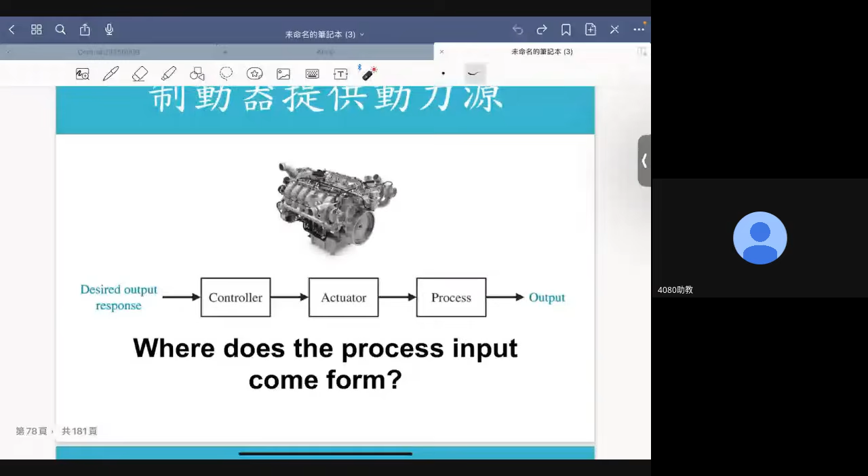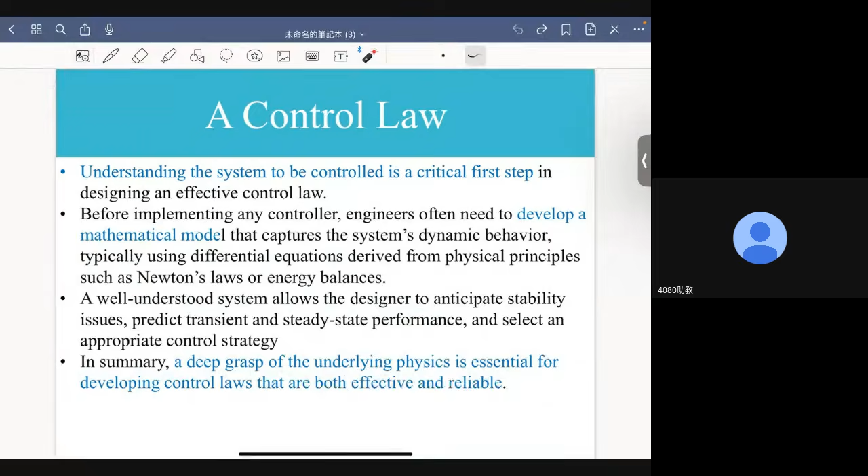To come out with a good control law, understanding the system to be controlled is a crucial first step. A deep grasp of the underlying physics is essential for developing control laws that are both effective and reliable. This is very important for a control engineer. To control a system I want to control, I need to have a very good, deep understanding of the behavior of the system. This is very important, all right?

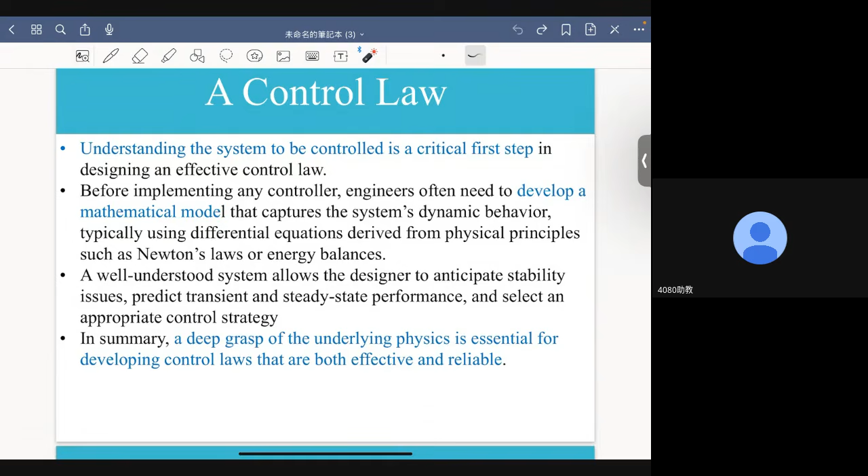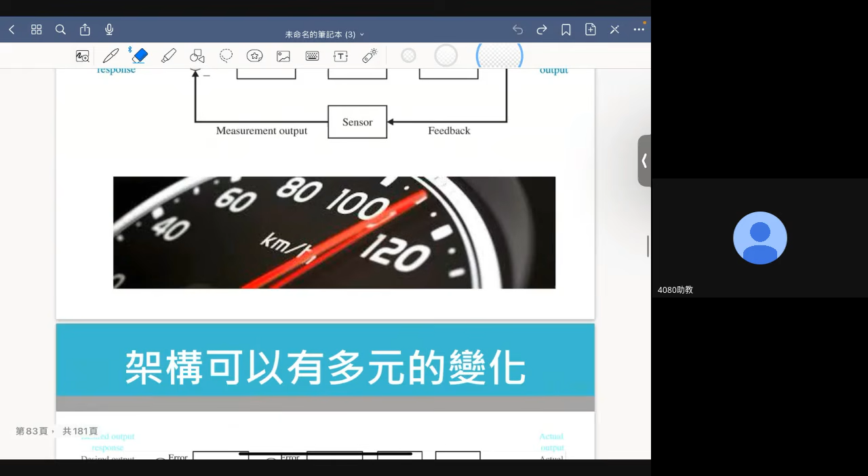Now, in this PowerPoint slide, I want to emphasize that feedback needs a sensor. This is sometimes a disadvantage of feedback control systems. Why? Because you need money to buy sensors. So for this very reason, feedback control is typically much more expensive and also much more complex than open loop control. I will talk about the other limitation later.

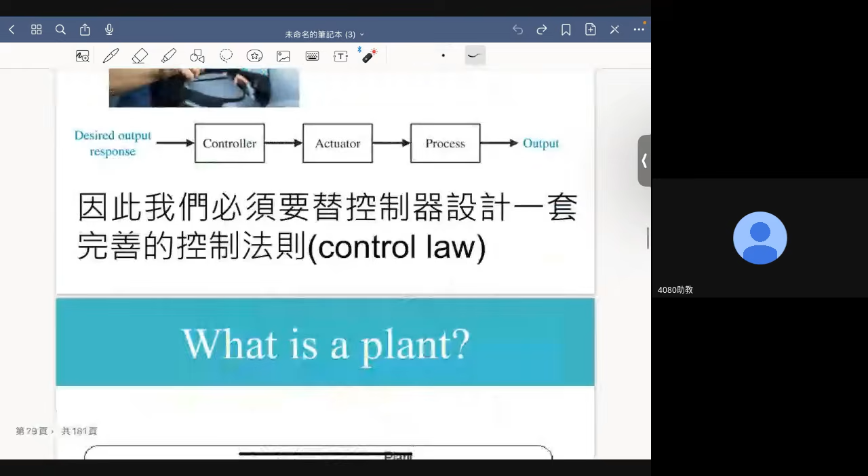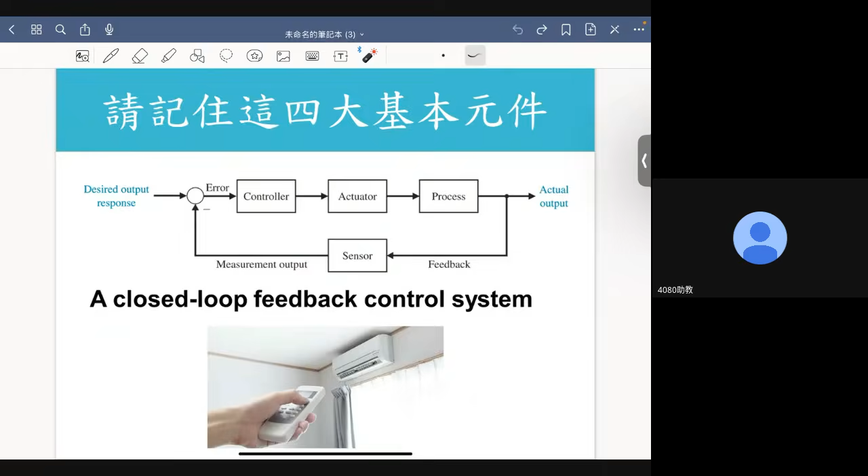Now, in this block diagram, what I want to emphasize is that this diagram illustrates the basic structure of feedback control systems. Based on these basic structures, you can come up with many advanced variations. For example, here is one advanced variation. Here you have two feedback loops.

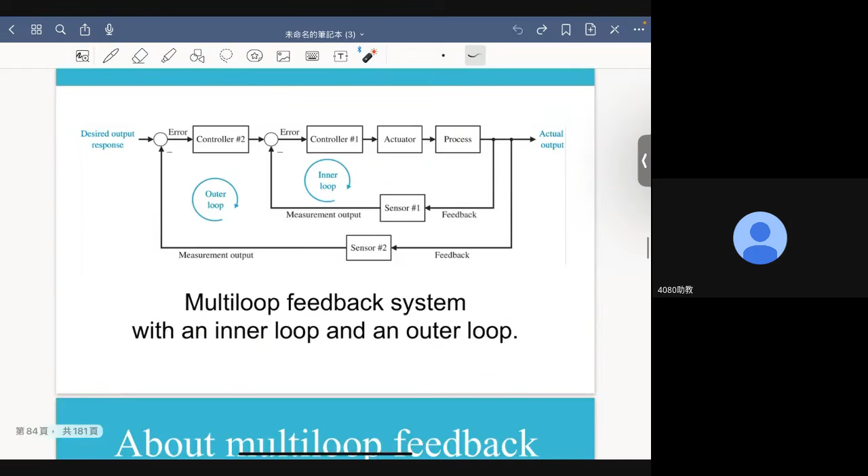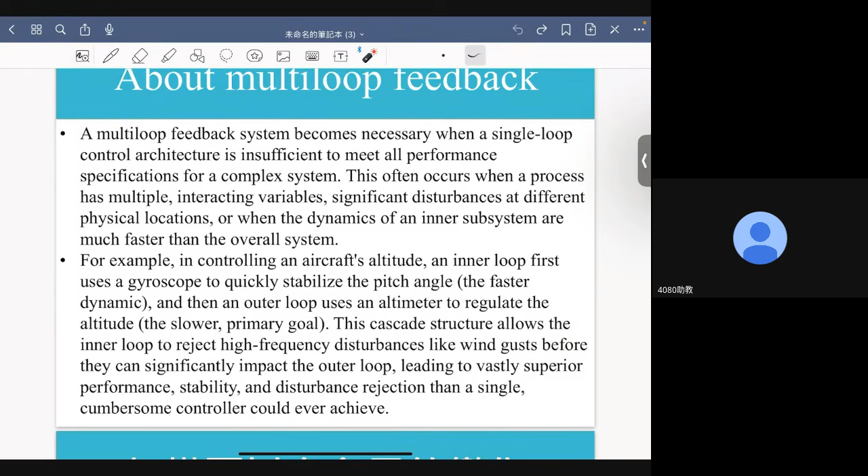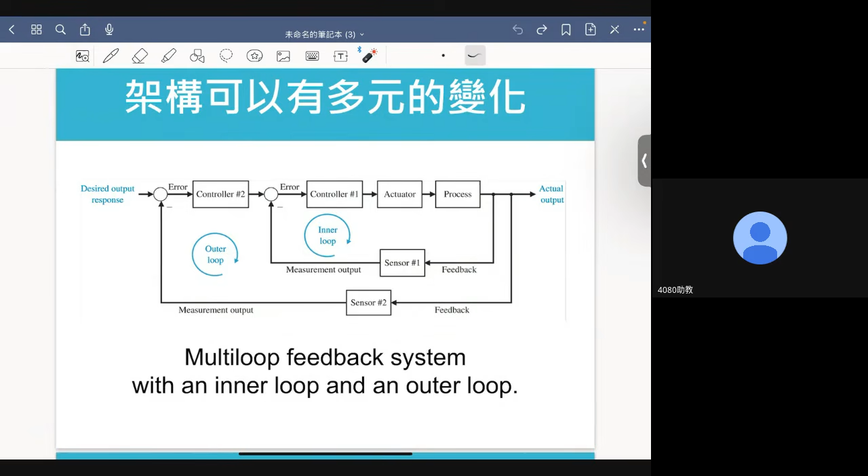Why do you want to do that? There are a bunch of reasons, but the basic idea is that, for example, you have a system which integrates mechanical parts and electrical parts. Typically, the time constant, the speed of response of the mechanical system, is much slower than the speed of response of the electrical system. That is why nowadays electric vehicles, when it comes to acceleration, typically easily outperform traditional gasoline-driven vehicles. So if these two systems have different time constants, different speeds of response, then typically it requires two control loops: one for the slower mechanical subsystem, the other for the faster electrical subsystem.

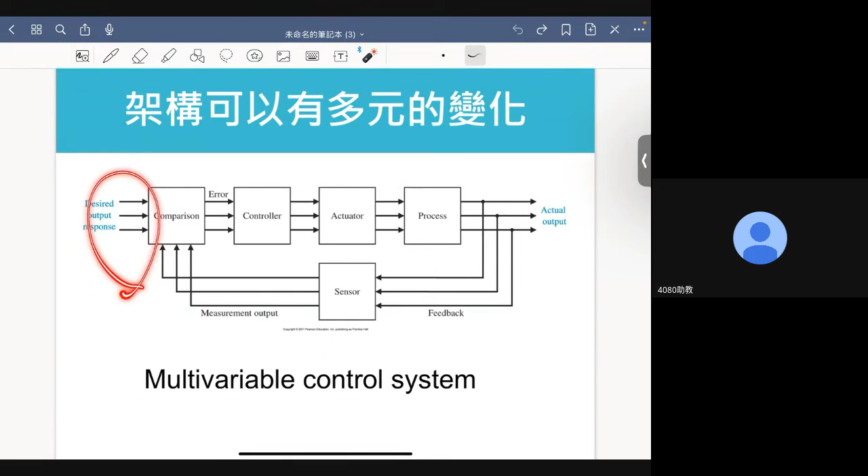Now, another variation is that what we saw before is a single input, single output system. But in reality, your system can have multiple inputs and multiple outputs. Why is that the case? This is a good example.

This is a generator which will convert—let's say it's a power generator. It will generate electric energy by burning fuel. Here is the boiler. The input of the boiler includes water, fuel, and air. The boiler will send its output to the turbine, which will drive the shaft to the generator to generate the electric energy that we want.

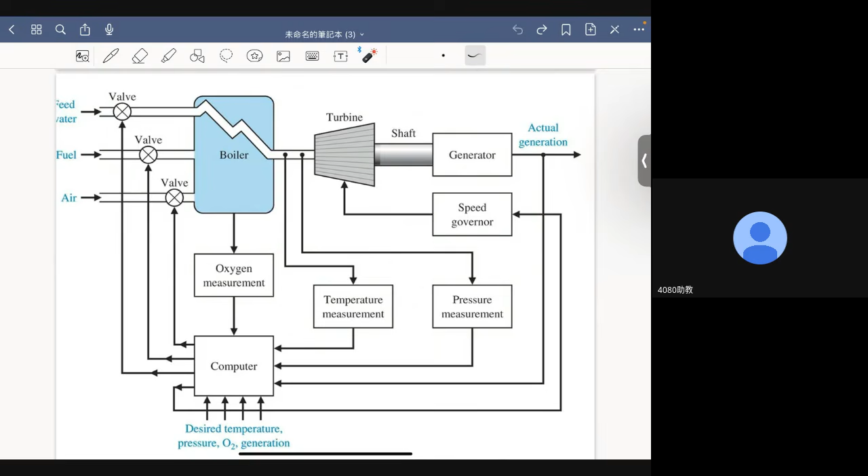And to monitor the operations of the entire process, we need to measure oxygen, we need to measure temperature, we need to measure pressures, we need to measure the speed of the turbines, and dynamically and adaptively adjust all these physical variables so that the efficiency of the power generation can be maximized. So by its very nature, it's a multiple input, multiple output system.

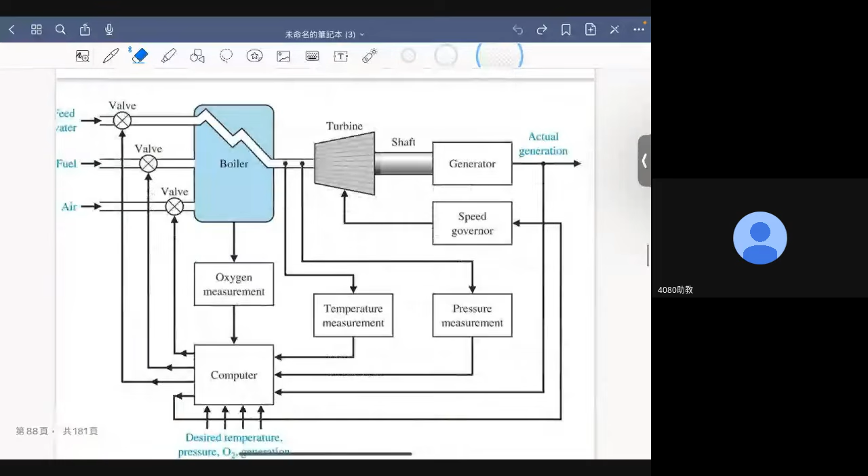But I want to emphasize that in this course, our focus is on single input, single output systems, which apparently is the building block of MIMO systems. Now, the next important element of this course is about uncertainties.

Why do we need feedback controls in the first place? The answer is uncertainties. What kind of uncertainties will we run into? There are basically three possibilities: input disturbance, parameter variation, and finally measurement noise.

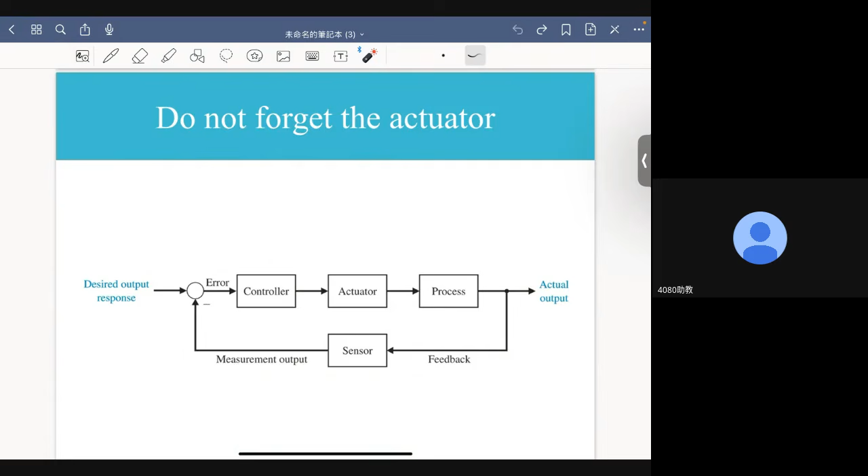Now, first of all, I want to emphasize again: remember this fundamental diagram of a feedback control system, which consists of four subsystems—controller, actuator, the process to be controlled (or the object to be controlled), and the sensor.

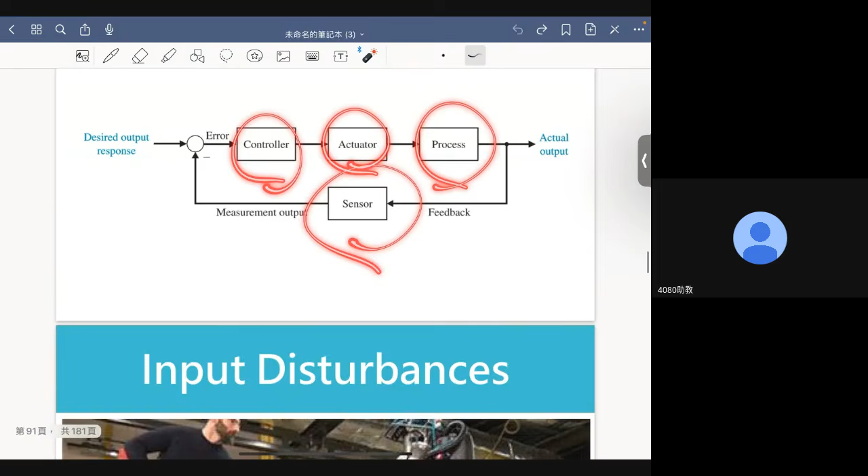Now, what is an input disturbance? Let's say you have a bipedal robot which can move around, and let's say you want to apply a force to it to make the robot fall. If the robot has a good feedback control system, it will somehow compensate for this disturbance and maintain its stability. We will run into all kinds of input disturbance in reality.

For example, in cruise control systems, the goal is to maintain the speed of your vehicle at a set speed. But you will run into different kinds of uncertainties. For example, you may come onto a road condition that keeps going higher and higher, or lower and lower, and that will generate gravitational force in different directions. And you will run into different road conditions.

You will probably drive your car against the wind, and that will let your car run into more resistant force. So an automatic cruise control system has to somehow compensate for those inputs, so-called input disturbances.

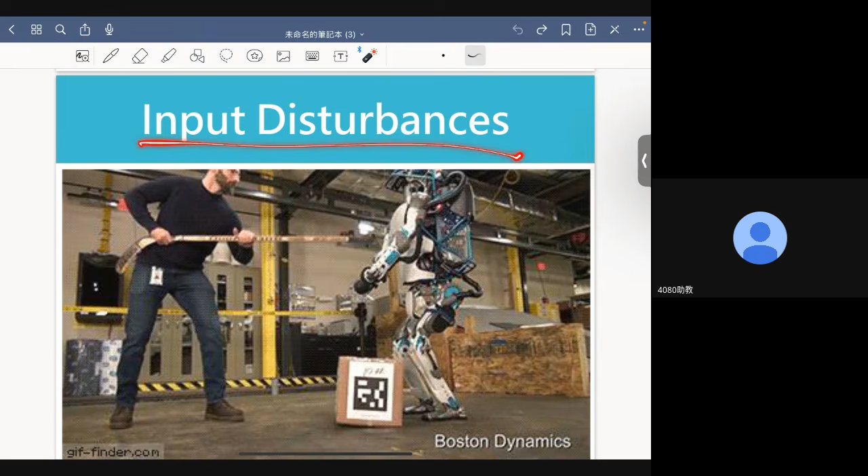This is another example, I've said it many times: the human body has many built-in feedback control systems. For example, when I'm lying down, everything is cool, I feel comfortable. Then suddenly I think I should stand up and do something useful. So I stand up. Now, one thing our heart needs to do is pump blood into every part of our body, and one of the most important parts of our body is our brain.

Once I stand up, something changed. When the heart pumps blood through the body lying down, it does not run into any gravitational force. When I stand up, there is a gravitational force pulling down. My brain senses that change, so it sends a signal to the heart. The point I want to make here is that my body needs to increase my blood pressure in order to counteract the negative impact of the gravitational force.

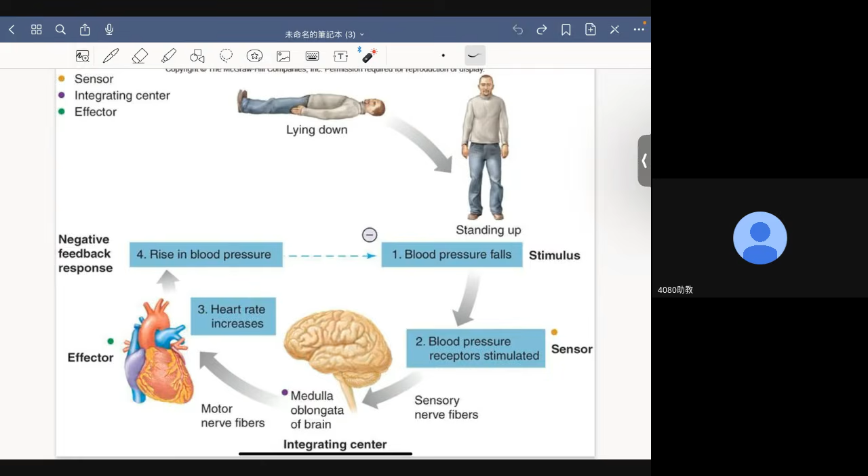So our control system is a very good mirror. The control system in our body, how it functions, is actually a very good indicator, a very good mirror of our health. Okay, let's skip these PowerPoint slides.

Now, the next possibility of uncertainty is parameter variation. For example, when designing an adaptive cruise control system, or just a simple cruise control system, you have to make an assumption about the weight of your vehicle—say 1,200 to 1,800 kilograms, depending on the number of passengers. But that may vary, it changes from case to case, and there are just overwhelming possibilities.

For example, when you design a feedback control system for elevators, there is no way you can be sure of the number of passengers, the overall weight of the passengers. That is an additional uncertainty, and that uncertainty exists all the time. It is the job of the feedback control system to take care of it—the impact of parameter variation will always exist, but how can I compensate for it, how do I minimize those impacts? That becomes a very important duty for the feedback controller.

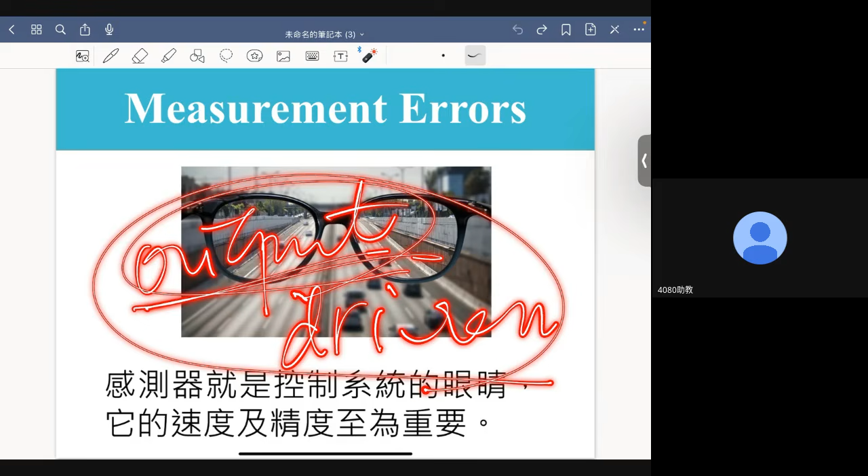So the reliance on sensors is the weakest point of feedback control systems, because once the sensor cannot provide accurate information, the feedback control system is doomed—there's nothing it can do to help itself get out of trouble. So when building a real control system, many people put emphasis on the development of the controller. That is, of course, very important.

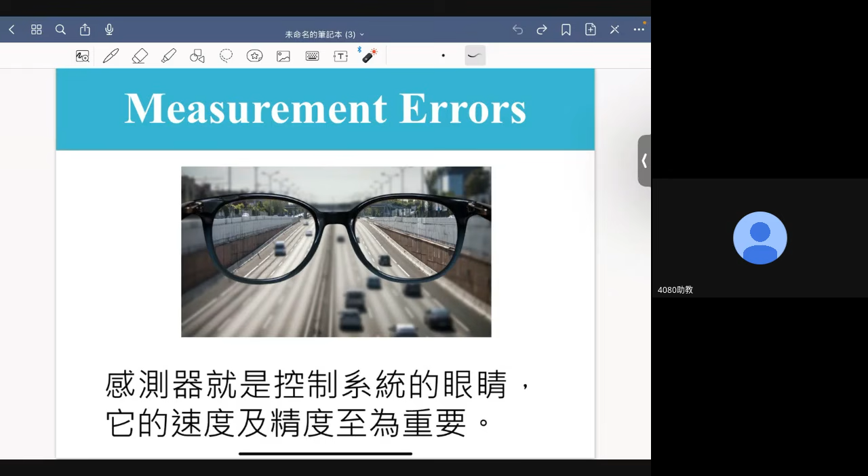As a control engineer, the first thing I need to do is make sure my sensor is solid, reliable, and calibrated to provide maximum accuracy, because everything I do in the future depends on it. If it provides false information, I will more than likely go in the wrong direction. All right, now let's get a real world example.

Our government told us this needs to stop. They would watch it, monitor it, advise doctors and hospitals to control the use of sleeping pills. It didn't work. Right now, the number of sleeping pills we take each year is already over 1 billion, while the population of Taiwan is only 23 million.

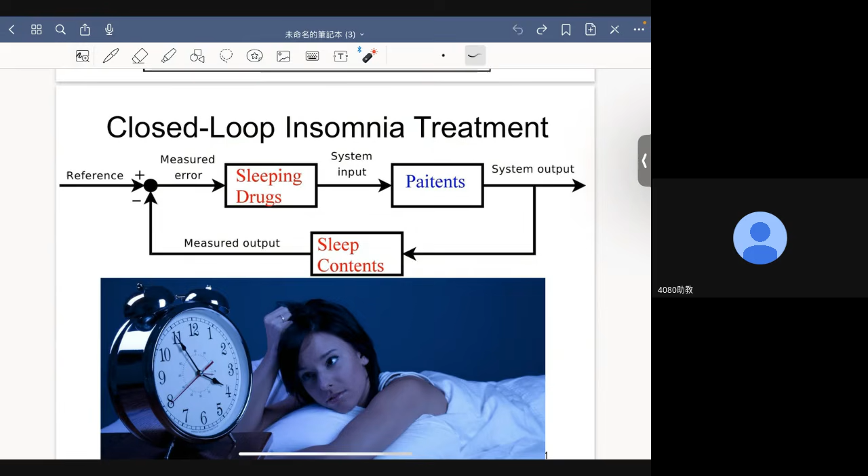A smartwatch can do something about it, but it's not very accurate. We need a good sensor to close the loop. Once the loop is closed, I think the performance of the system can be elevated to an entirely different level. Converting a system from open loop to closed loop, everybody knows, or at least a lot of people know, is often a solution to many different problems. But I think we should extend that understanding to many different areas of our life, including sleep medicine.

Now, the next issue I want to talk about is performance indices: how do I characterize the performance of a system? I divide the performance indices of a control system into three levels. The first level is absolute stability, meaning every variable of that control system must have bounded values, that is, it will not diverge as time progresses.

For any mechanical system, if any stress, strain, or temperature goes up to infinity, that mechanical system will definitely crash. Any circuit, if the voltage or current of any part goes to infinity, that circuit will definitely burn.

So absolute stability is of vital importance, the very fundamental requirement for feedback control systems.

The second level of performance indices includes speed and accuracy. I want the system to be fast. I want the temperature to be 25 degrees Celsius, and the tolerance should be as small as possible. Let's say plus or minus 0.1 degree rather than plus or minus 1 degree. I prefer the 0.1 degree difference.

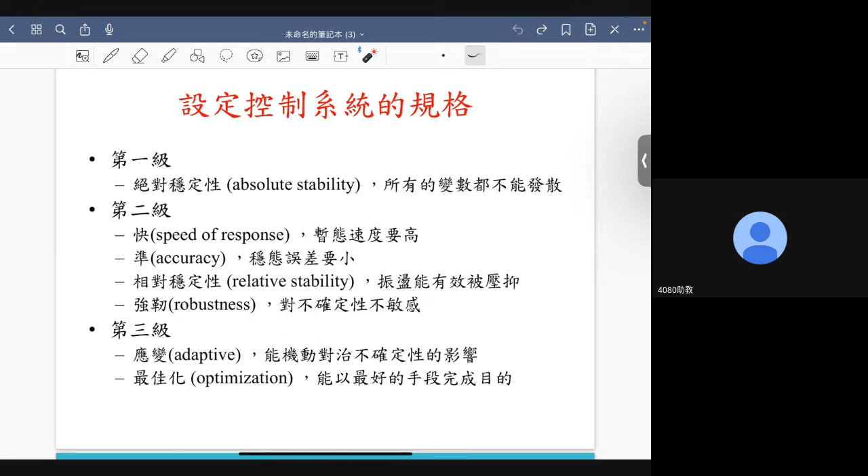And sometimes, if possible, we want to perform optimization. That is, after guaranteeing the speed, accuracy, stability, and robustness, can we do something about the system so that energy consumption can be minimized? Because that can generate some financial reward. So stability, accuracy, speed, and robustness are four different aspects of control system performance.

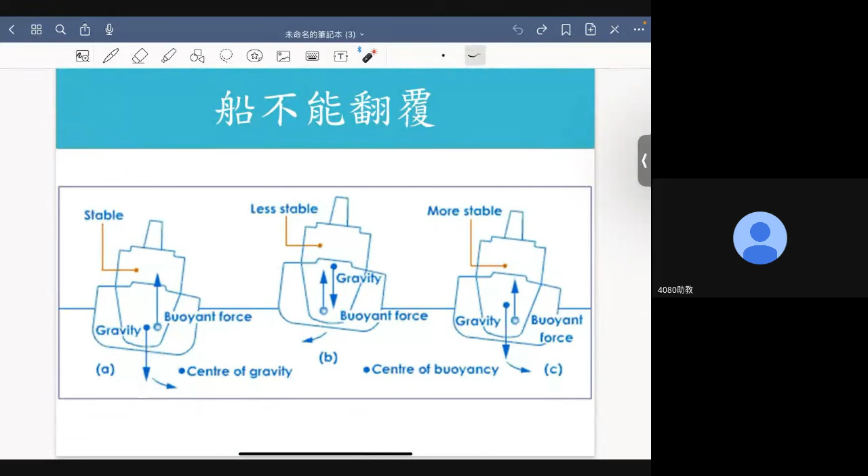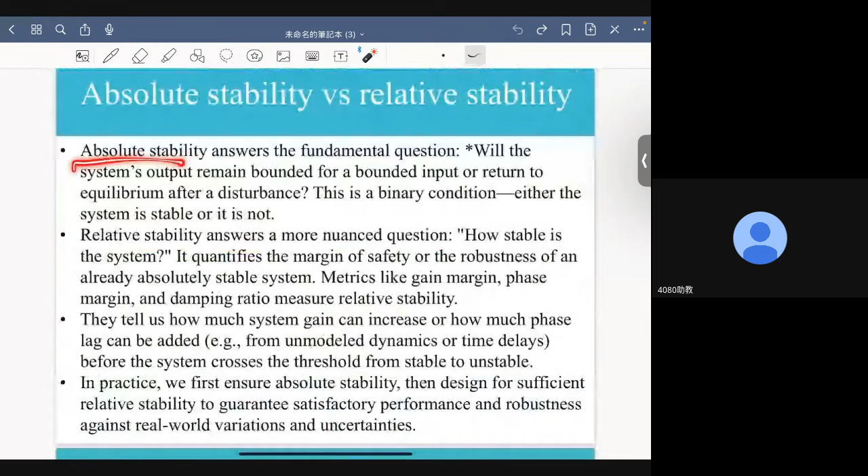Now let's talk about stability first. When it comes to stability, the first thing we want to make sure is, for example, a boat cannot sink, an aircraft cannot lose its speed and crash. Absolute stability answers the fundamental question: will the system output remain bounded for a bounded input?

So, to make sure our system has absolute stability, one criterion is that its output, as a matter of fact every variable of that system, has to be bounded as time progresses. This is very important.

Let me go back one step. When I was a graduate student, my advisor professor, when teaching control engineering, told his students, myself included, that there is no single definition of stability. This is only one definition, but it is a very good one.

That is, every variable of the system has to be bounded. It cannot diverge. Otherwise, the system will crash, and that is a disaster because people will die.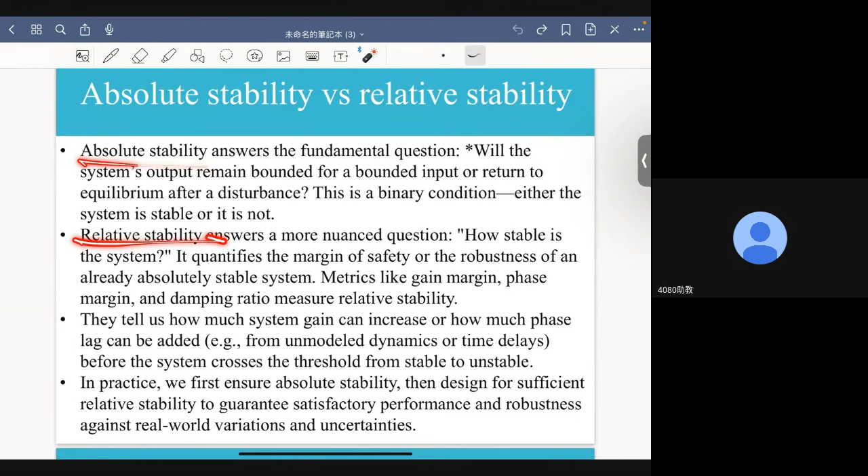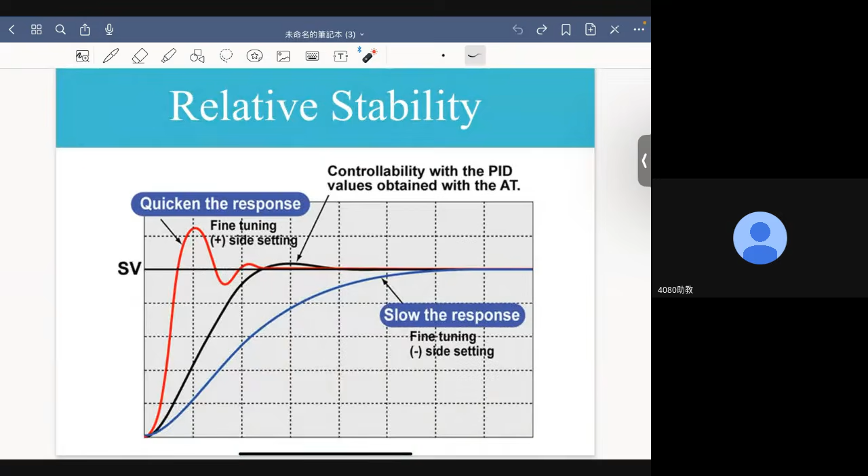Now let's look at the response of a system. This, as you will see in the future, is what we call step response. Let's say this is time and this is room temperature. You turn on the air conditioner and then watch how the room temperature changes.

Let's say you are in winter and originally the room temperature is very low. You turn on the air conditioner and set a desired room temperature, and the actual temperature of the room can increase in this way.

This is a slow but stable response. Then it can increase in this way, or it can increase in this way. As you can see, these are the differences between these three curves. The first thing is about speed. This is the slowest, this is the fastest. The second difference is about stability. Here, you have oscillation. Here, you have overshoot.

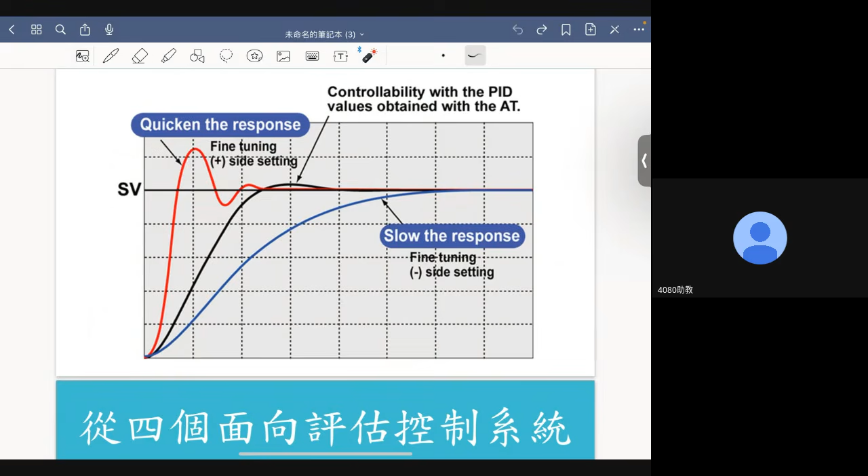You have undershoot. In this operating condition, you will feel less comfortable because in some time, the room is simply too hot, and in other moments, the room is just not warm enough. But here, the temperature is relatively stable. So compared to the other operating condition, it has better relative stability.

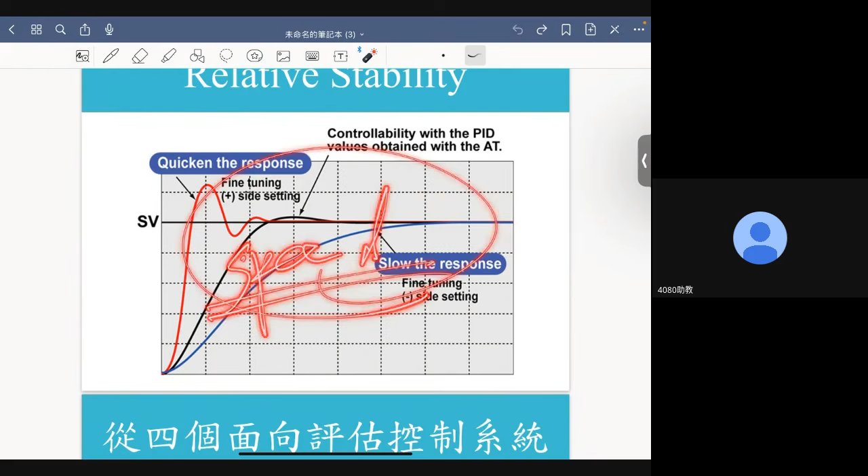What is the price to pay? Apparently, speed. So speed and stability are often two compromising factors that you have to consider.

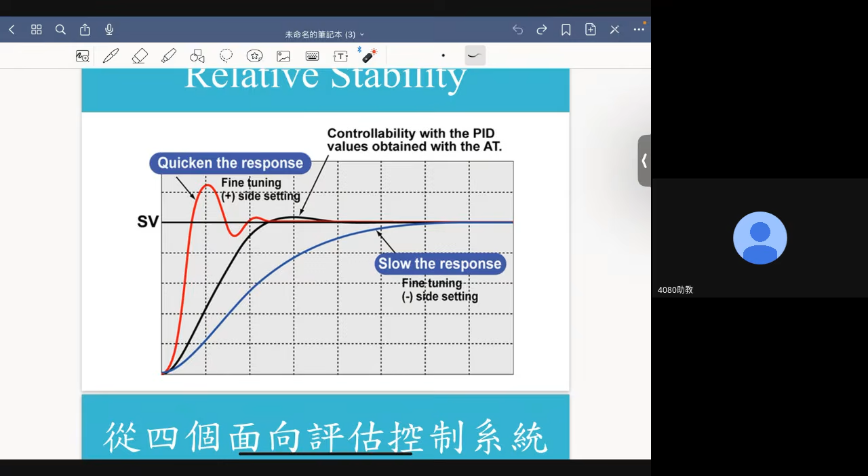That is like driving a car. If you want to go over a corner, if you want to drive very fast, then your car will be less stable, right? And vice versa. So speed and stability are often two compromising factors. You have to sacrifice one for the other. And therefore, you have to keep a good balance between these two factors.

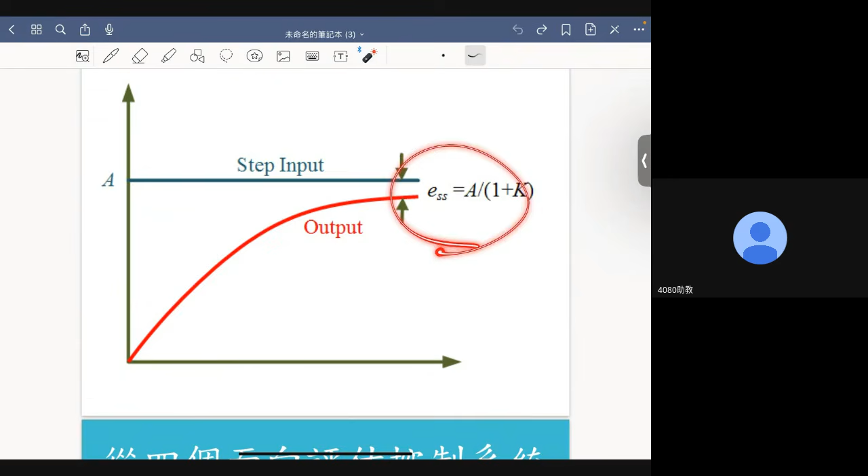The other is accuracy. Accuracy means that my output, the difference between my output and input, this error can be minimized. The smaller the error, the higher the accuracy of my control system.

And the other is, of course, speed. When it comes to speed, I can classify systems into instantaneous and dynamic systems. What is an instantaneous system? Like this gear train. I have an input gear, I have an output gear. The reason I want to put them together is I want to change the direction, or speed, or torque ratios of my input and output.

Assuming that among these gears, there is no backlash, whenever you rotate this shaft, the output shaft will rotate accordingly. You move it faster, the output shaft will move faster. If you turn its direction from counterclockwise to clockwise, the output gear will respond accordingly. There is no time delay, no latency. Everything from input to output just happens instantaneously.

So controlling such an instantaneous system, under such circumstances, is really a piece of cake, because whatever you want in the output, you can adjust the input and you'll get it instantaneously.

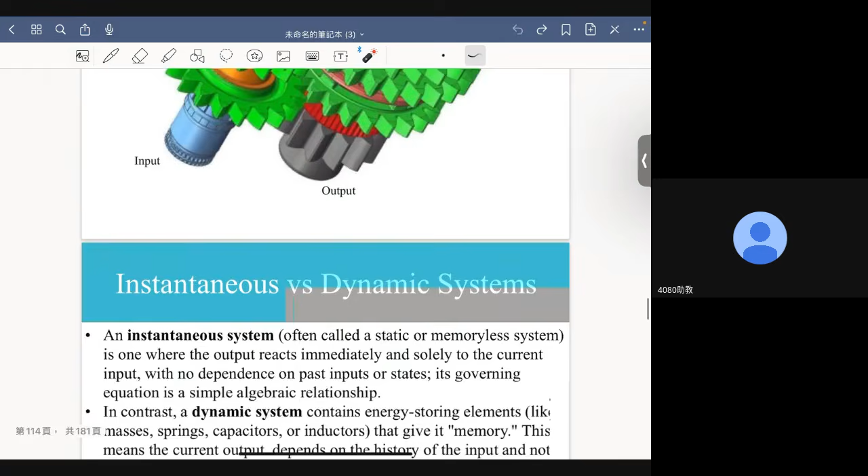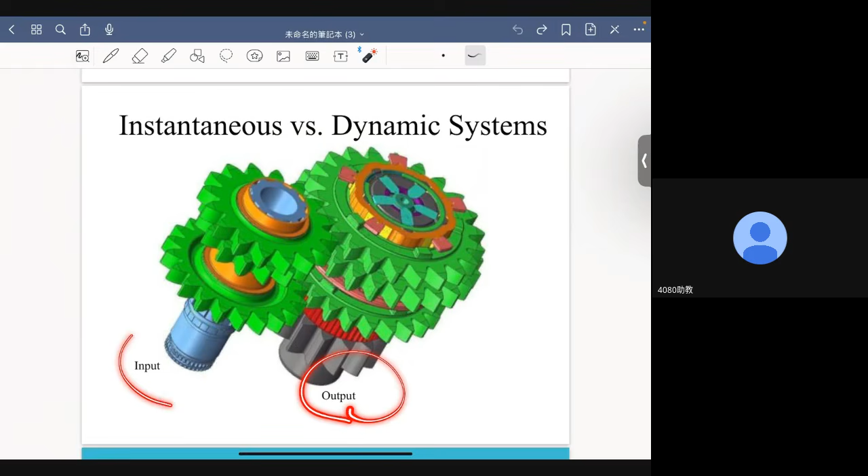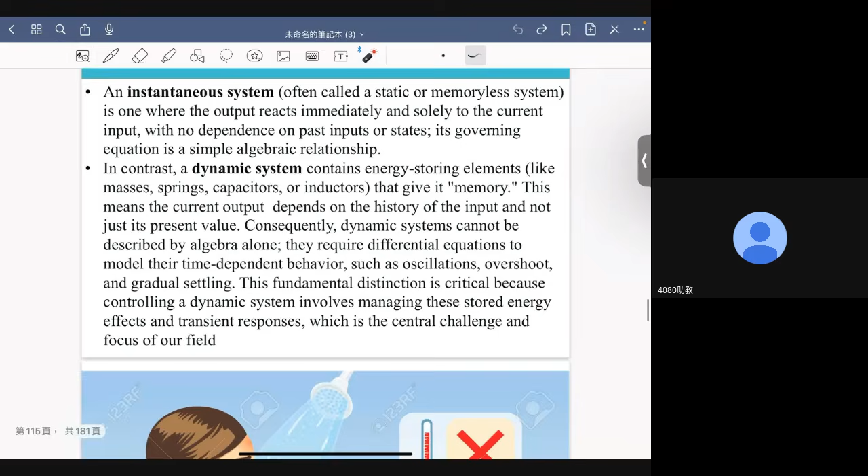However, a dynamic system is not the same. A dynamic system typically has some energy storing elements like masses, springs, capacitors, or inductors. As a result, it has memory, which means its output will not be like an instantaneous system, where one of the big features is that the output only depends on the current input. It does not depend on the past history of the input. Now a dynamic system, on the other hand, has memory, which means the output will not only depend on the input, but also depend on the history of the input.

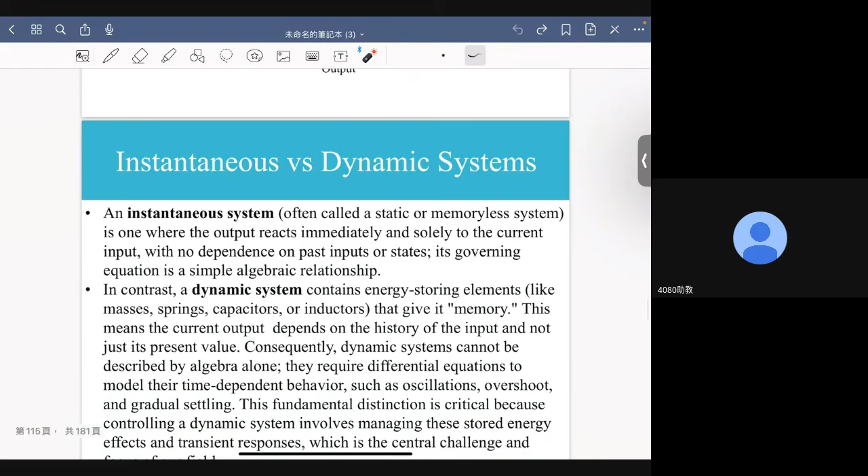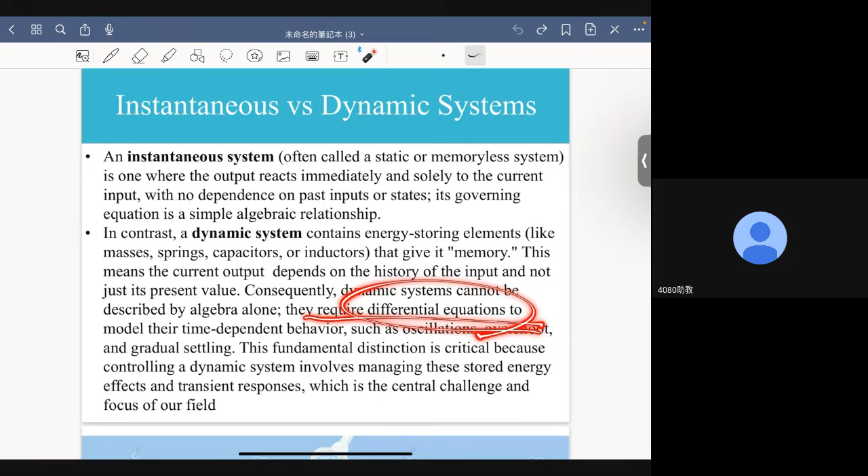Why? Because the system has energy storing elements, it therefore has a memory of the past input. So the current output depends on the history of the input and not just its present value. Consequently, a dynamic system cannot be described by algebraic equations. Typically, for an instantaneous system, all you need to do is set out the algebraic equations, and then you can describe the relationship between the input and output. But for dynamic systems, that's not good enough. To establish a mathematical model, what you need is typically differential equations to model the time-dependent behaviors.

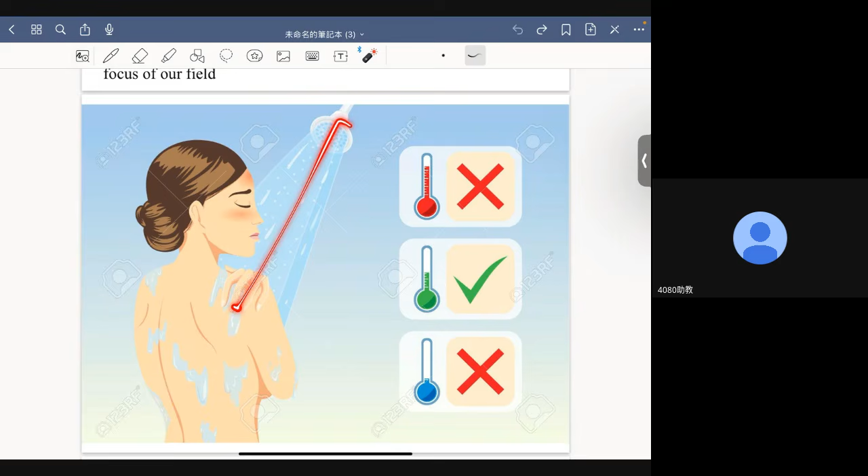Now, for example, when you want to take a shower, it's a demonstration of a dynamic control system. You want to take a shower during a cold winter day. You want the water to be hot, so you can have a comfortable shower. But that is not what happens. You turn the water on, the water comes out, but the temperature is not warm. It's not hot, it's icy cold. It would take a while for the temperature of the water to go up, right?

And if I'm not patient, I just turn the temperature higher and higher and hope that the temperature of the water will rise fast enough. But typically, I will run into overshoot.

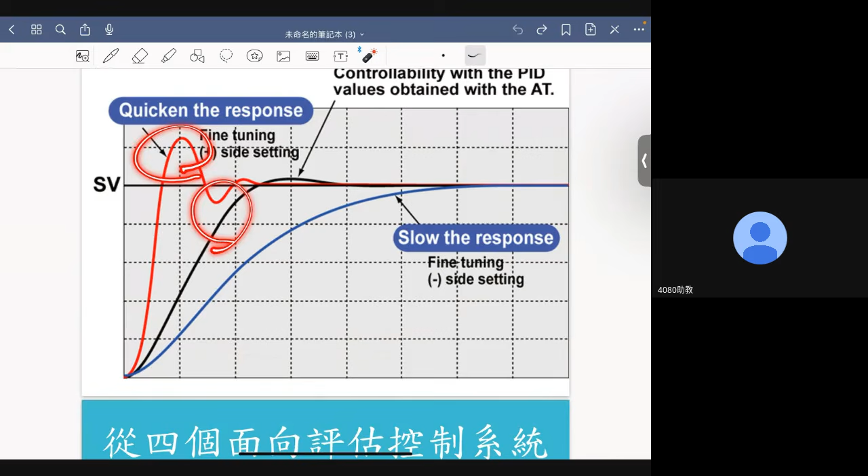The temperature of the water is simply too hot, so I have to turn it down again. This is a very good example of a dynamic system. You will encounter overshoot, you will encounter undershoot, and things like that.

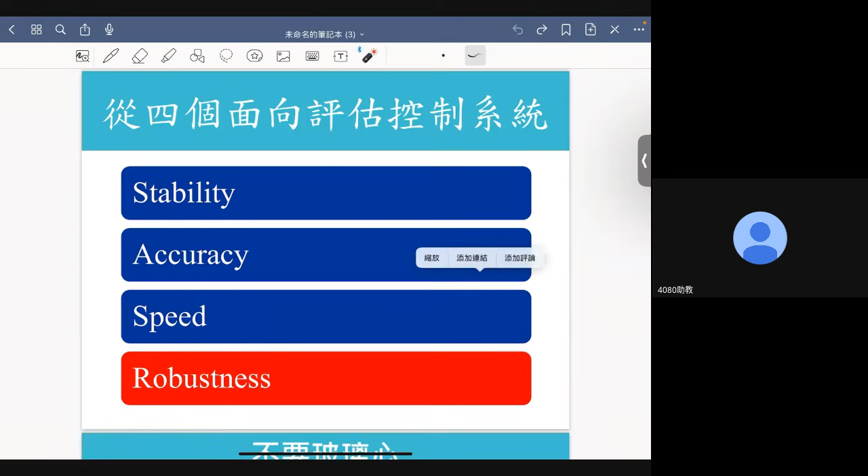The final dimension of the second level of performance index of control systems is robustness. It means we need to be less sensitive to outside criticisms or outside pressure. Similarly, control systems need to be less sensitive to uncertainties.

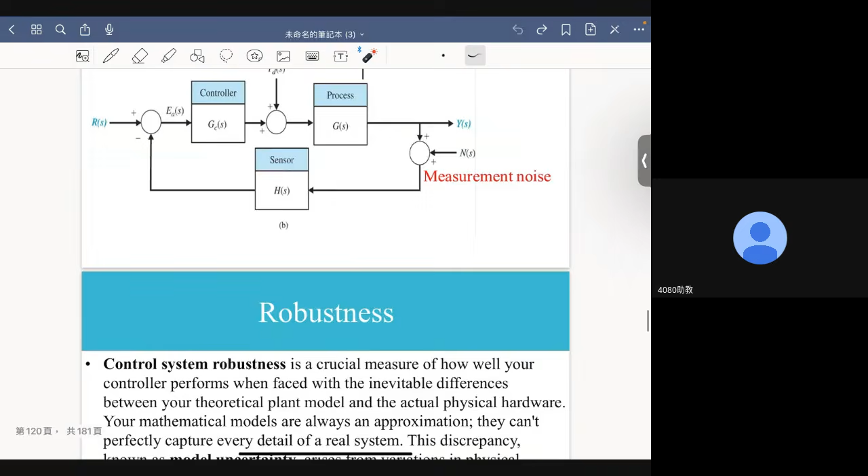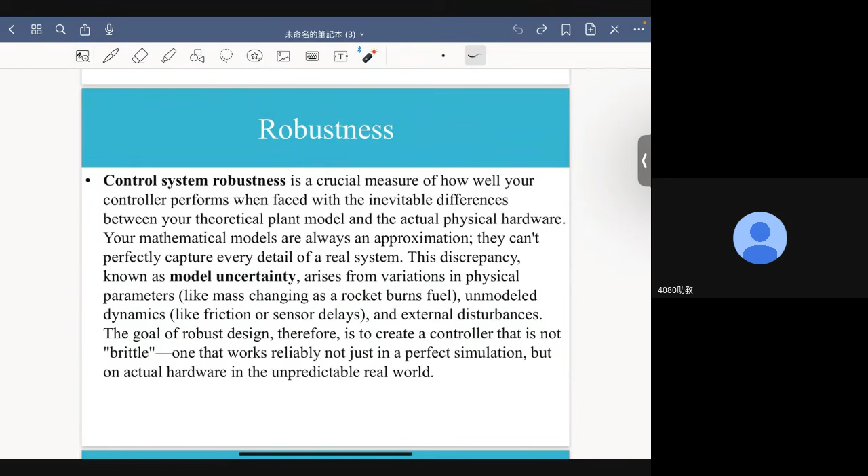The very reason we need feedback control in the first place is to compensate the effects of those uncertainties. When we run into the inevitable circumstances of these uncertainties, our feedback control systems need to minimize their influences so that the output can conform to my specifications. So the very first reason for feedback control system is to conquer, to compensate, to overcome the impacts of uncertainties, which include input disturbance and parameter variation.

Measurement error cannot be killed by feedback control. Feedback control cannot deal with the measurement noise problem. Once I have made a measurement error, it will feed back directly to the controller, and the controller will have no idea how wrong, how inaccurate the measurement is. So it's really the weakest part of feedback control systems.

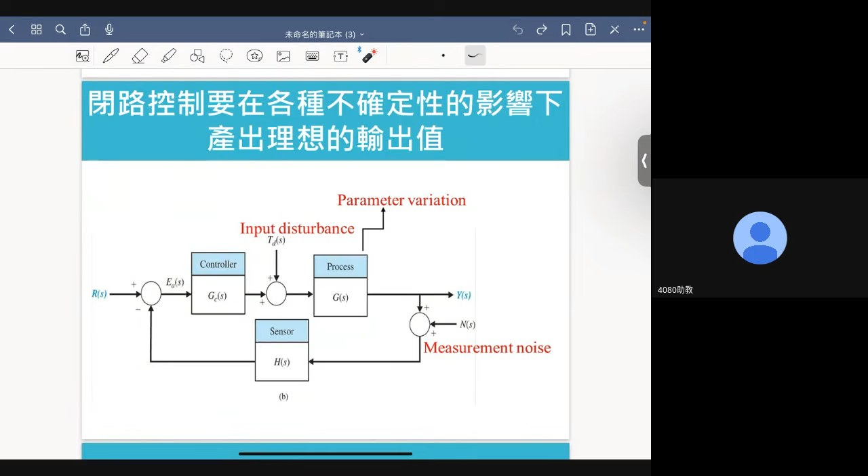Sometimes you will hear me repeat the same thing again. It's not because I'm too old, or have a problem like dementia or Alzheimer's. If I repeat the same material again, there is only one reason: I do that on purpose. The reason I want to repeat the same thing is that I think it's of critical importance. By repeating it, I hope you can get so familiar, so sick of these repetitions, that finally you can learn it by heart and never forget it.

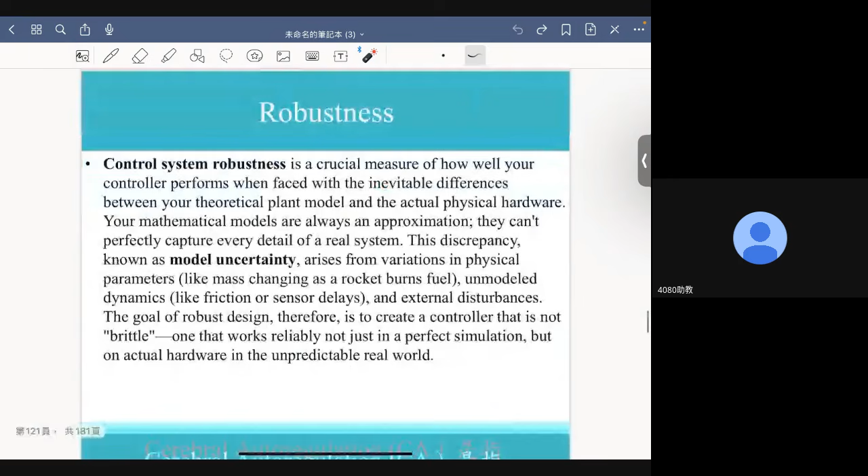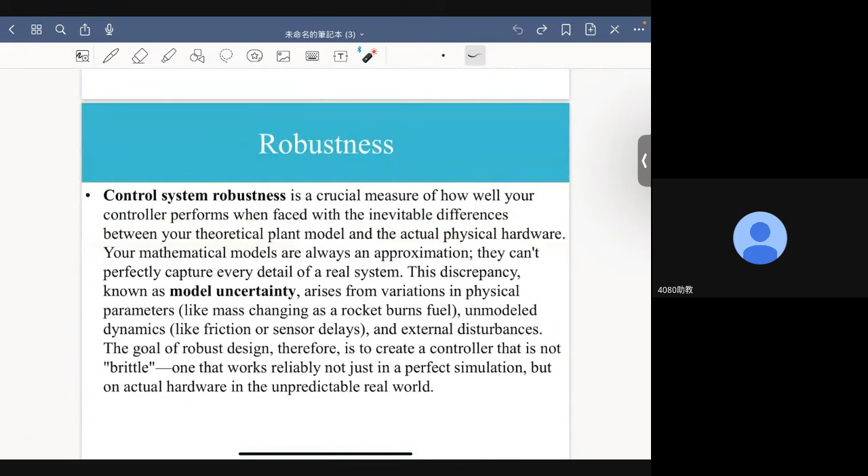Robustness is a crucial measure of how well control systems perform when faced with inevitable differences between your theoretical plant model and the actual physical hardware, and all the model uncertainties and other uncertainties.

Let me give you an example, and this is a real example: cerebral autoregulation. Remember, blood pressure is very important. If my blood pressure is too high, I may run into problems like stroke or myocardial infarction, both of which are very, very dangerous. Blood pressure exists everywhere in our body, and it will go up and down.

There is another place where blood pressure is of critical importance: the blood pressure of our brain. The blood pressure of our brain should be as constant and stable as possible. We have a special name in medicine for blood pressure within our brain: cerebral blood flow.

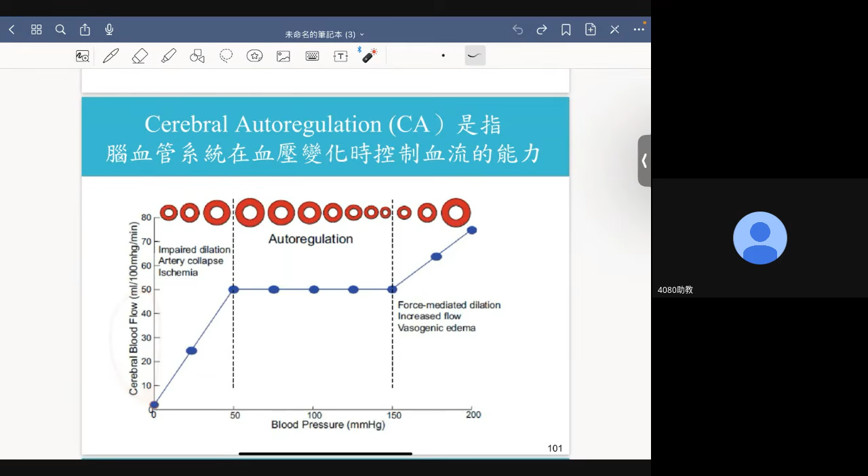Blood pressure can go up and down depending on my physical conditions. For example, if I'm exercising, my blood pressure probably will go up. If I'm under a lot of stress, my blood pressure will probably go up. But for our brain, that is not acceptable. So our brain, our body will try to regulate this blood flow within our brain to be as constant as possible.

This is the region of blood pressure within which our body can maintain the cerebral blood flow constant, and this is very important. If the blood pressure is simply too high, the cerebral blood flow will inevitably go up and down. But the stronger you are, the healthier you are, the wider this interval—that is, your brain and body are more robust to blood pressure changes.

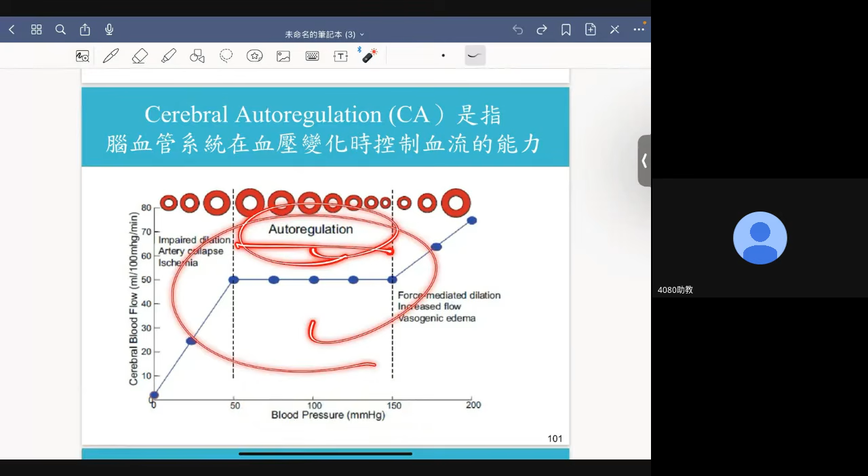This autoregulation property is of critical importance to our body's health. For example, if I'm a patient who suffers a stroke, then this region will be much narrower, or sometimes it will shift.

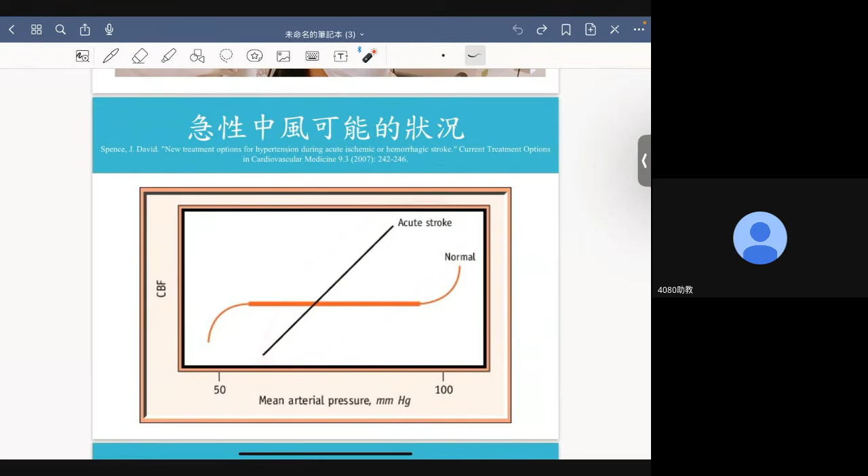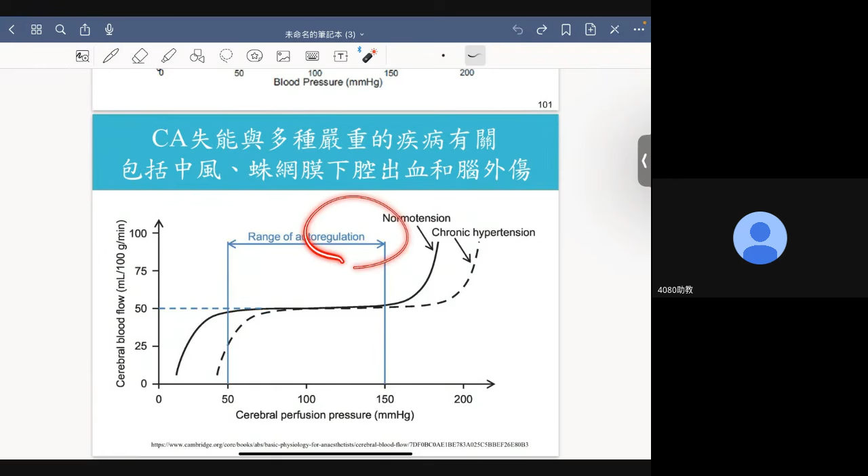Let's just skip these two slides. This curve is for a normal person, and this curve is for a patient suffering from acute stroke. As you can see, the performance of the feedback control system for autoregulation of cerebral blood flow has gone way down—it just lost its functionality in regulating cerebral blood flow under variation of body blood pressure.